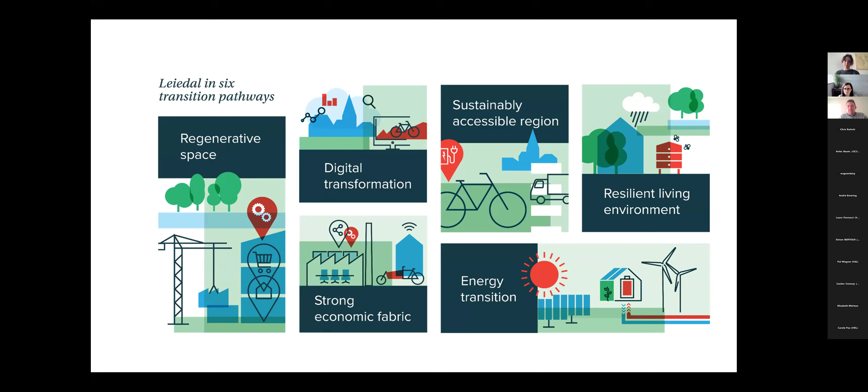We are as a region, but of course, so as the whole of Flanders, highly urbanized. That comes with a lot of negative consequences, like you need a lot of mobility, you have to travel a long time, and there's a lack of open space and nature.

There are big costs for governments, for public services, and so on. One of the main ideas in Flanders on spatial planning is the so-called building shift or construction shift, which is in fact to preserve open space as much as possible, and for the existing already taken space, try to use it in a better, more qualitative way.

Our goal in figures is that by the year 2040, no extra land take will be done anymore. And how do we want to tackle this?

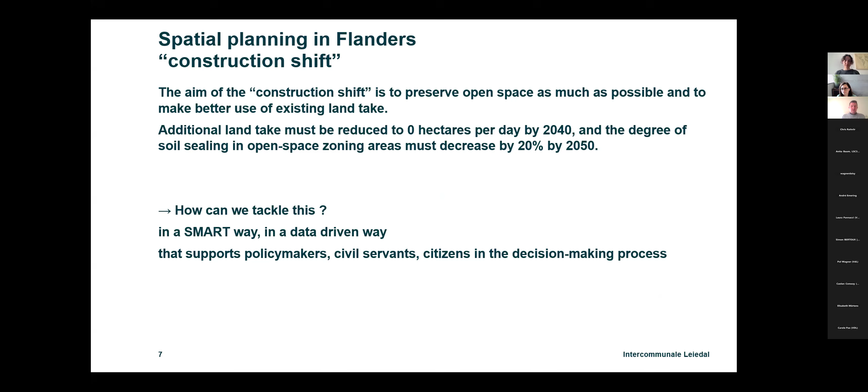Well, we wanted to do it in a smart way, in a data-driven way, because we think it's important and essential that policymakers, civil servants, citizens have the same data, see the same data, so that they can make better decisions.

Our main idea or key element is that we are convinced that we have to build a kind of visualization platform, or at least different platforms where visualization is key during the whole policy planning process.

By monitoring, by developing different scenarios, making simulations, you need visualization as a way to put all the information together in the same way, so that you can share knowledge, share ideas and visions.

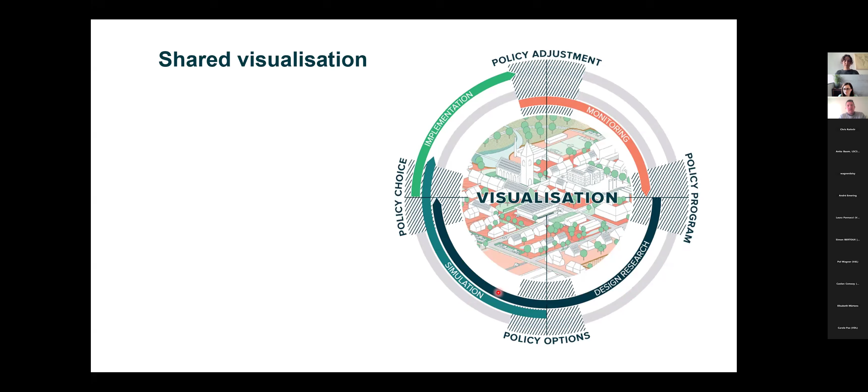So that you can make better decisions. This afternoon, I will present 3 projects. I'll put it in the scheme of visualization, and explain a bit of our first steps in that digital transformation process.

The first project is the Data for All project. It's an Interreg North Sea project that ended last year. The main idea was that we work on mobility data, especially data concerning bicycles.

The idea is that we collect qualitative data around mobility on a regional level, not only for one municipality, but we try to combine it on the regional level, and then we want to gain insights into it so that we can use it for policy making.

The challenge that we were confronted with was that there is a lot of data, but it's very fragmented. It's on the cloud, on a PC of a civil servant, and there are all kinds of different types of data.

There is data about the shared mobility bikes, but also when you measure velocity, there are 4 or 5 types of radar systems that are used, and we have to collect and combine all these different data types.

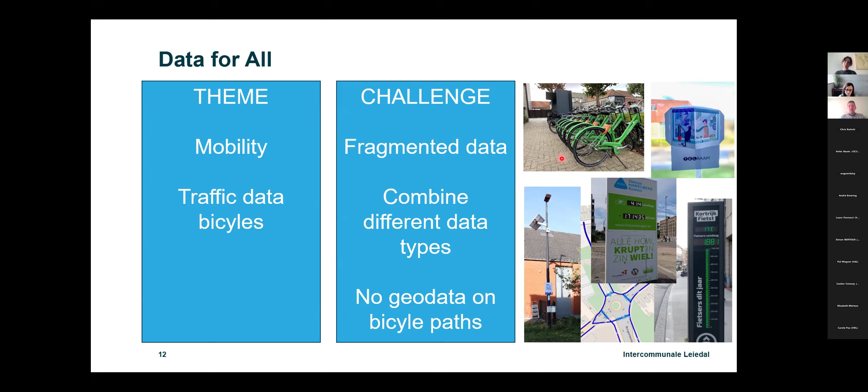What was also important is that even at a very basic level, we don't have in Flanders a layer of a GIS file where only the bicycle paths are present. So we had to tackle all these problems, and our solution was to create a dashboard

that is fed by different data, where we built some data pipelines to combine all these different data types. We also tried to make a first bicycle path layer for the whole region.

On a technical level, I won't explain it too much, but we combined the several types of data. So we collected them, reformed and transformed them, standardized them, and put it in a so-called data vault.

Based on that enriched, standardized, clean data, we had data sets, and we built some GIS services so that we can make the dashboards and the Power BI tools. Because at the end, we had very specific products.

We had a GIS portal where you can see all measurements, for example about the amount of traffic of bicycles. And for each measurement point, you can deep dive into that data with a Power BI report.

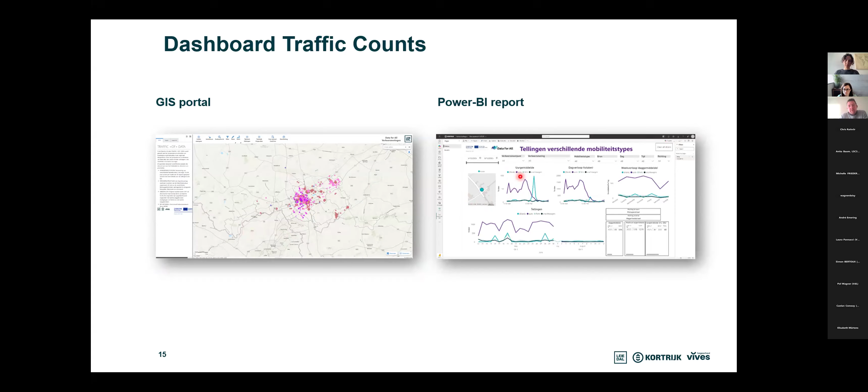I will just show you some screenshots of the applications. This is the dashboard focusing on the city of Kortrijk, where each bullet, each color, is a measurement point. The different colors are because they are different systems

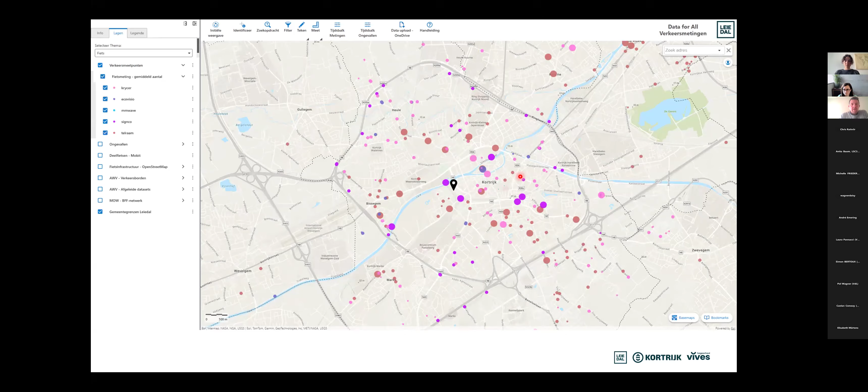that are in place. We don't have it only for Kortrijk, because as an intermunicipal organization, we also wanted to make our products ready for all the municipalities. So based on focusing on the city of Kortrijk, we developed the data pipelines for the whole region.

So at this moment, all the data of the municipalities, but also the data of the province and the data of Flanders, is combined and put together.

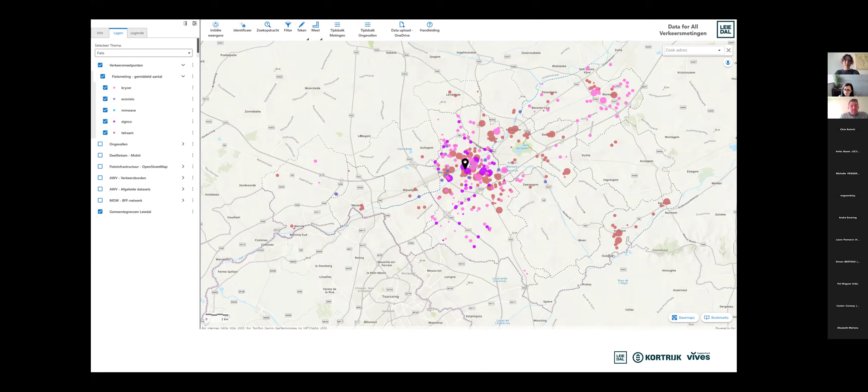And when you want to have more details, you can click on a measurement point, and then you see on a Power BI more information. It's not only the data of the amount of bicycles, but also the accidents that happened.

And finally, we also developed a layer of the bicycle paths based on OpenStreetMap data that we cleaned, interpreted, and categorized, and combined with some other data, so that we now have at least at our regional level a data layer concerning the bicycle paths. That was the first project.

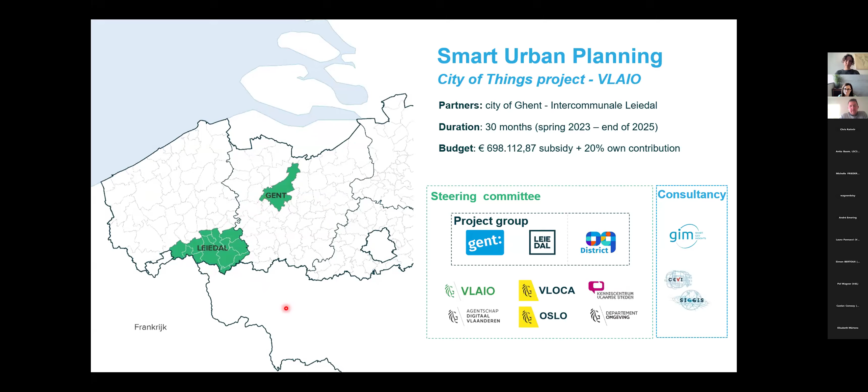We worked together around the theme of spatial indicators concerning urban planning, things like amount of parcels, amount of addresses, amount of buildings.

Net land take, the amount of greenery, and so on. Here the challenge is more or less the same. There exists luckily a lot of data, and there exist a lot of different geoportals to check this data, but they are all separated next to each other, in so-called silos. Another challenge is that this data exists on different scales, different levels, and in different forms.

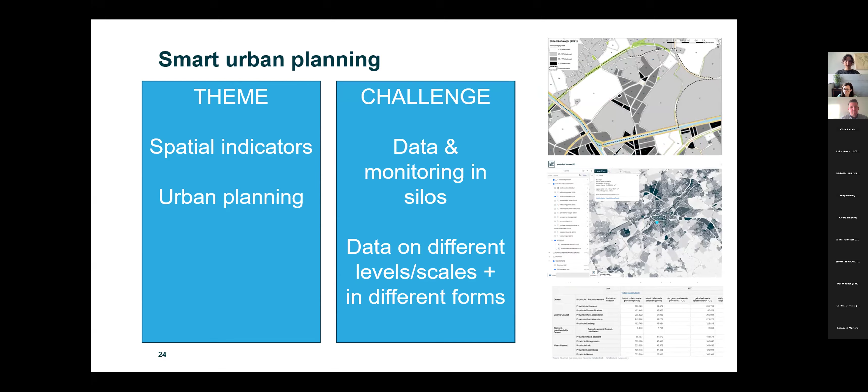The solution we put in place here is a little bit similar. We again developed a dashboard to combine the data, but we introduced a new level: the level of the parcel block. So a parcel as a new building block where you can aggregate and combine data.

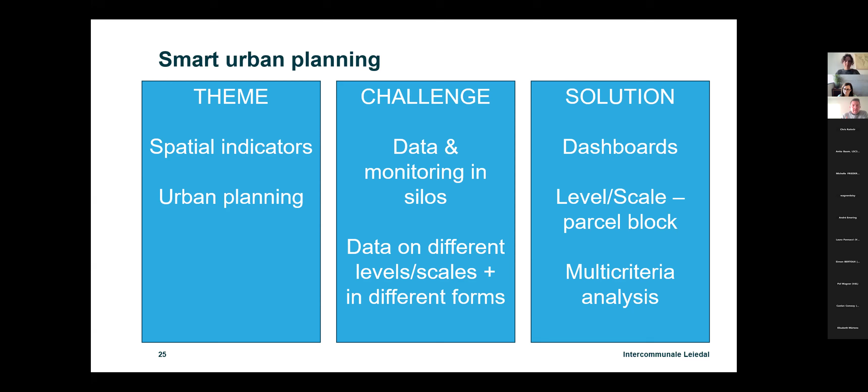Another element, because all the data is next to each other, we organized a dashboard to do multi-criteria analysis to have immediate insight into the data. I will show you the results.

There are in fact two use cases, and in each use case there were four steps. There was the need analysis: what does a policymaker want? Then we checked what data was available. Then we processed the data to realize this dashboard in a data visualization step.

The first use case concerns the proximity of services. As you know, if a city or region grows in population, the challenge is that you need a lot of services to support that population. It's about green space, but also schools, shopping, kindergartens, and so on.

The main question we wanted to tackle was: if you are an urban planning officer, you want insight into which services are in the environment, but also what their surface area is, and what the capacity of a facility or service is.

In Flanders, and maybe in Luxembourg too, if you want to give a permit to a construction project, you can impose some conditions, such as requiring a certain amount of greenery or a certain function, and you need to define which type of service or facility to impose. This application can be useful for that.

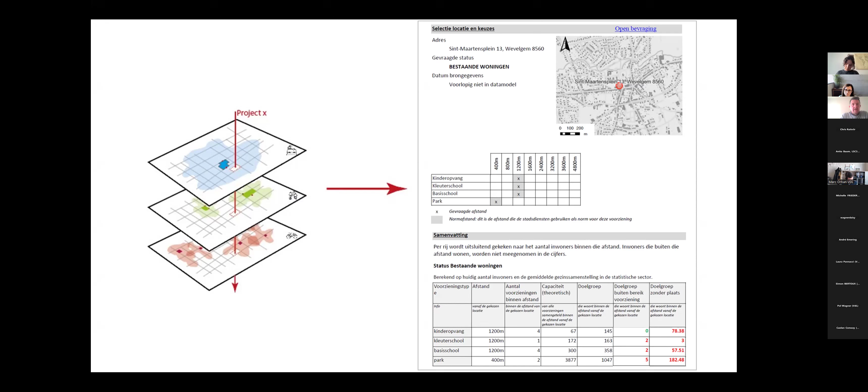There was another use case, concerning the monitoring of the land take, with the idea that within 2040 we can't take more, or use more land than what's already taken.

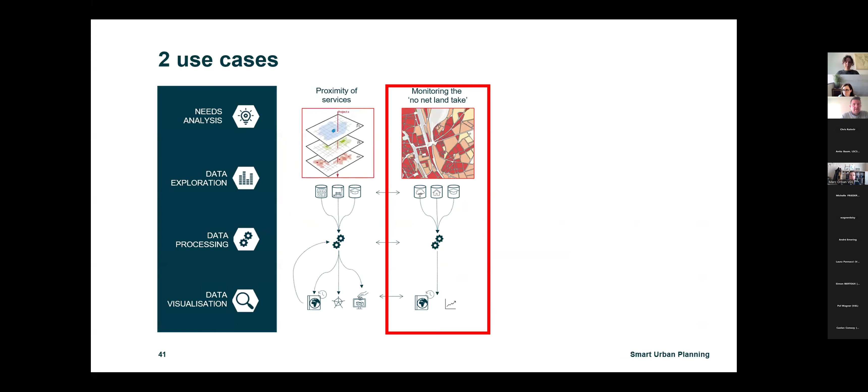We developed a dashboard that puts together all indicators and where you can do some analysis. Instead of one GIS portal or dashboard for one indicator, we combined a lot of indicators already in one environment, and we developed the pipeline behind it to add other spatial indicators. You can see the indicators for several years.

You can indicate a specific place, the so-called parcel block. If you click on it, you have information on all the parameters for that specific place. But you can also click another parcel and then make comparisons.

You can combine different parcel blocks because you want more insight into a bigger area. And of course, you can draw your own area to collect all the information and send it to your email, with the spatial indicators and their values for the location you drew.

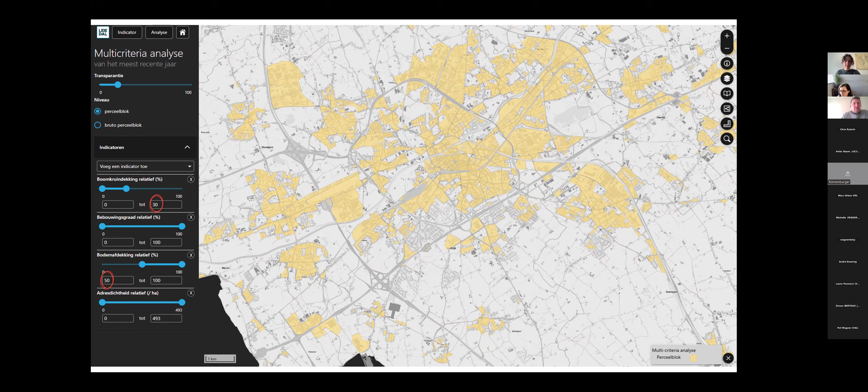The third project is the Twin for Resilience project. That's a project we do together with Leiedal and also LIST located in Luxembourg. It's a project that's still ongoing, and it works around digital twins.

Digital twins, but specific for urban planning. The idea is that decision making is hard, is difficult, and with the digital twin we can facilitate that decision making. But there are some challenges.

At least for us here in Kortrijk, we have a lack of 3D data, especially for buildings. You have to find out what technical platforms you will use, the internal processes to collect data, but also the way you make your designs and so on. You have to define it more.

And how can you use that digital planning in participation, so that the decision making, the discussions between policymakers, between administration and policymakers, between policymakers and civilians or citizens, goes quicker, more objective, and so on. The solution we see here is, first of all...

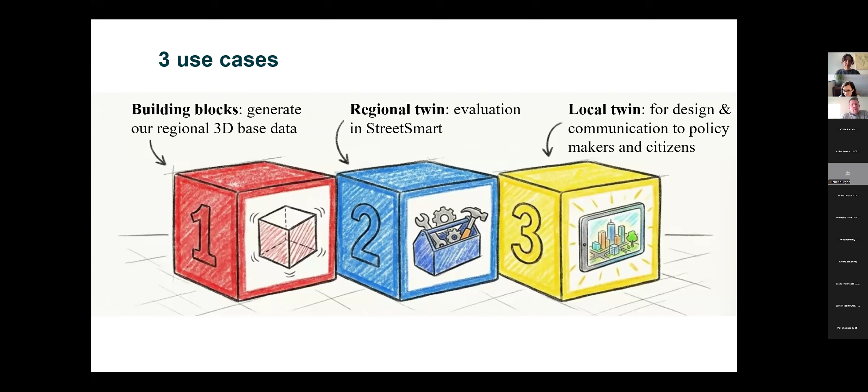The first use case is again a very basic element. Nowadays, what do we have from the Flanders level? We have 2D data of all the parcels, and there is also 3D data, but at the level of detail one—you only see the footprint of the building with the height, so you have a kind of cubes. This is clearly not enough if you want to do a serious spatial plan.

So what is our aim? That we are at least at a level of detail two, so that you see a building with the shape of the roof that's recognizable, and also with some extra buildings around it. Luckily, we have point clouds in our region. We take it now.

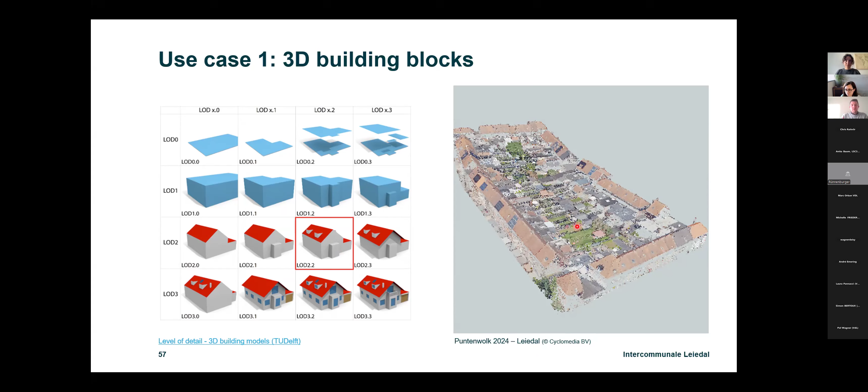This year it will be the third time we do it, so we do it every 2 years. So we have quite an actual insight and overview of point clouds of actual data about this.

And within this project, we had the opportunity to work with the open source roofer tool, and that tool combined with these point clouds and also with the contours of the buildings, we were able to realize our own LOD 2.2 3D buildings.

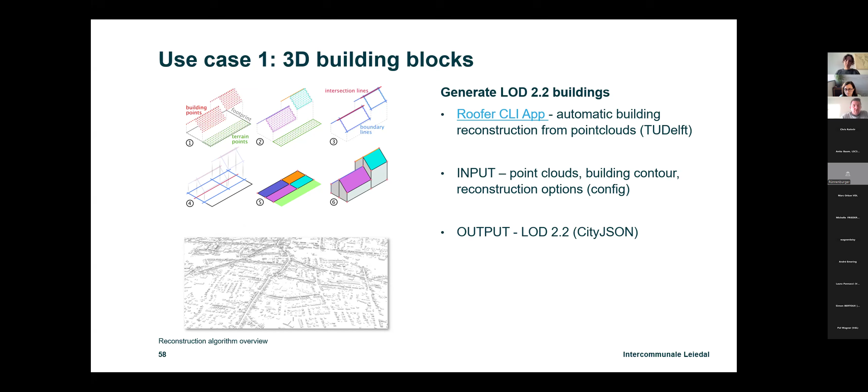I will show you what that means. So if we had that, now we can generate our own 3D buildings, and we can do it for each project we have planning task for. That's quite interesting. Beforehand, we had to look for or buy this type of data. Now we can generate it immediately, and we can do it every 2 years again.

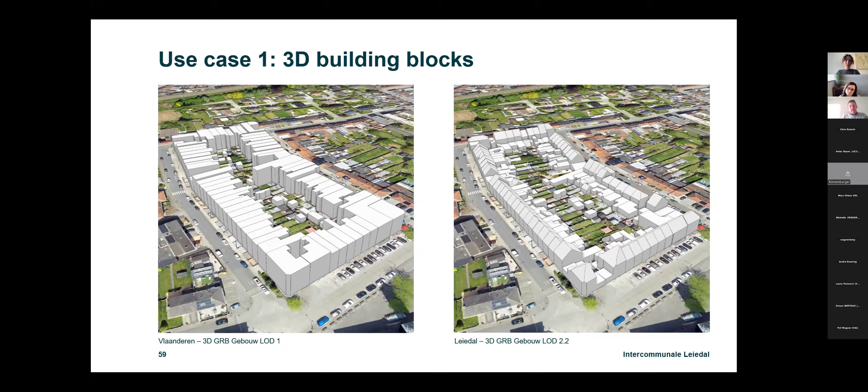So every 2 years again, that's also interesting. We have actual, or more or less actual, data on this. We are able to export it or transform it into different data types, so we can use it in SketchUp, for example, in a GIS system, or also in a game engine.

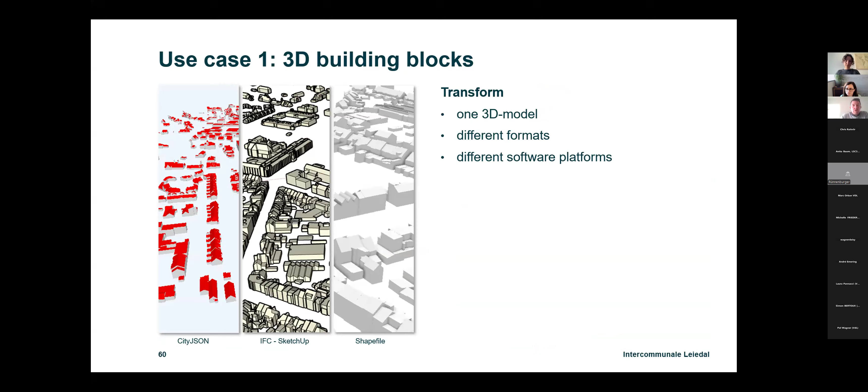Here you see the data where we generated it, and another school, a gaming school, used this data to give a demo of how you can use this data in a game engine and explain a future development of a part of the city.

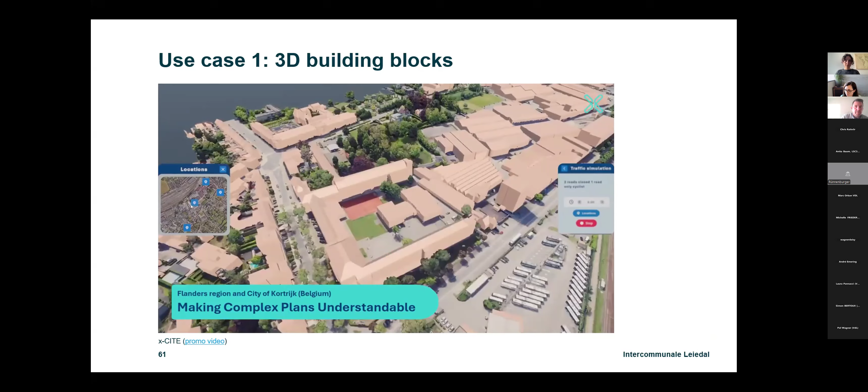It also has the ability that with this data you have immediately richer data, because you have the height of the buildings, the volume of the buildings. You can make a combination of the amount of surface versus the footprint of the building, and that gives you an idea of density as well.

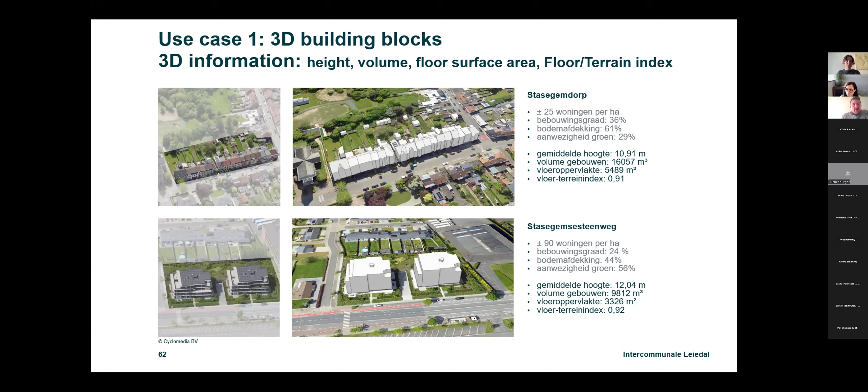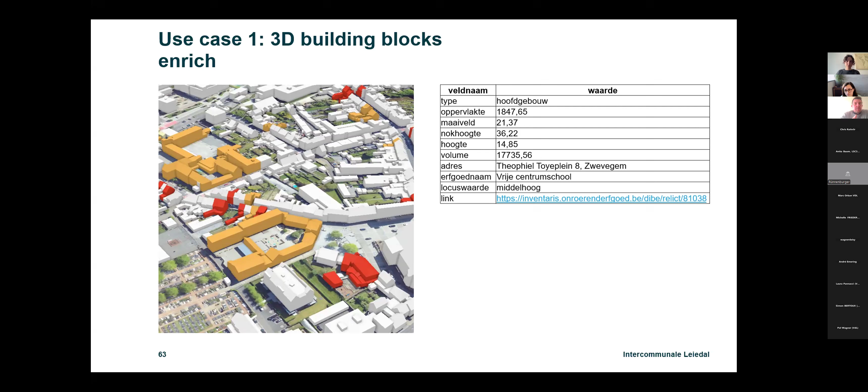And we can link all the data that we already have on a 2D level in GIS data with these 3D building blocks. So that's very interesting to give an insight, and maybe here, for example, it's about the heritage and value of all the buildings. So we can use existing data and visualize it in a 3D way.

To end this first use case, now we are doing some explorations of how we can distill data out of the point clouds concerning trees and also concerning the surface, the terrain model. But that's still work in progress.

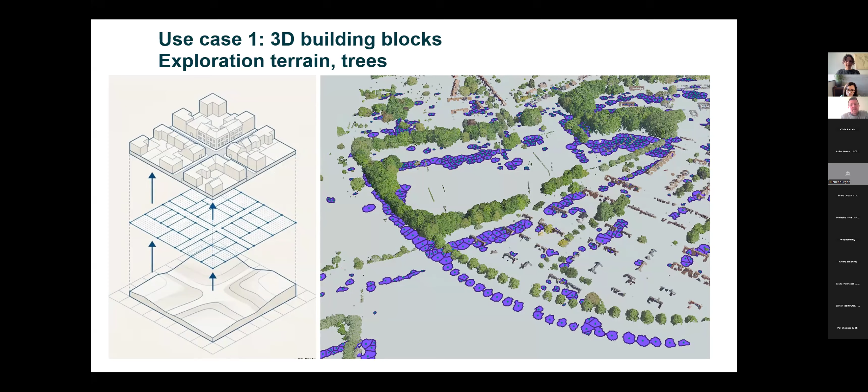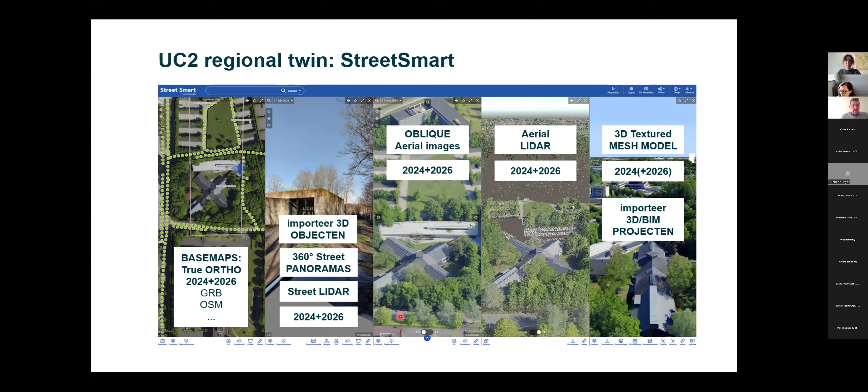The second use case is the development of the regional twin. In fact, we have a regional twin because when we collect all that point cloud data, we use the Cyclomedia Street Smart solution, and that gives you aerial images, street view images, but also a 3D mesh, a 3D environment where you can explore, do some measurements, do some shadow analysis and so on.

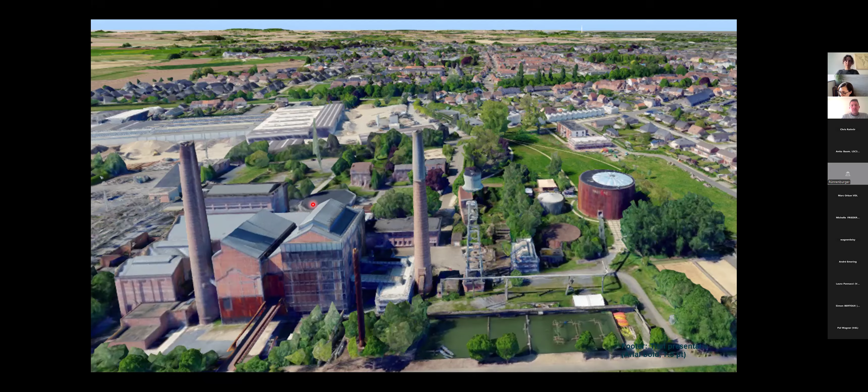So we've already had it for, I think, 4 years now. And the idea is, what we saw is that the municipalities use it quite a lot, but they don't use it enough, because the possibility to put new 3D models of a future development in and do that kind of analysis is something they don't do enough.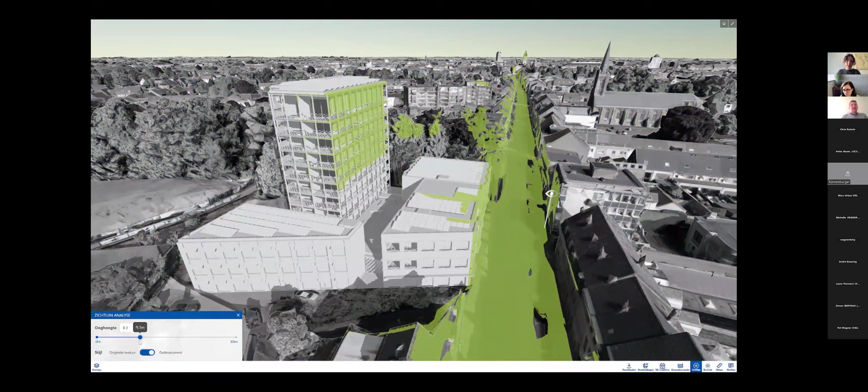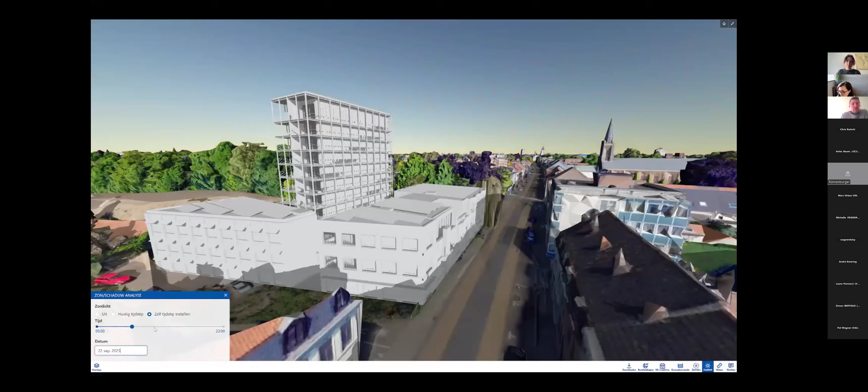So we train them, we show them how to do it, and also made some governance material. For example, what you see here is that we put in a BIM model, a 3D model of a future development, and we do some sight analysis.

You can do the same, but then also do shadow analysis for all moments of the year. That also gives a good insight into the impact of the building, and this application also makes it possible to put that model into the environment and have a quick tour.

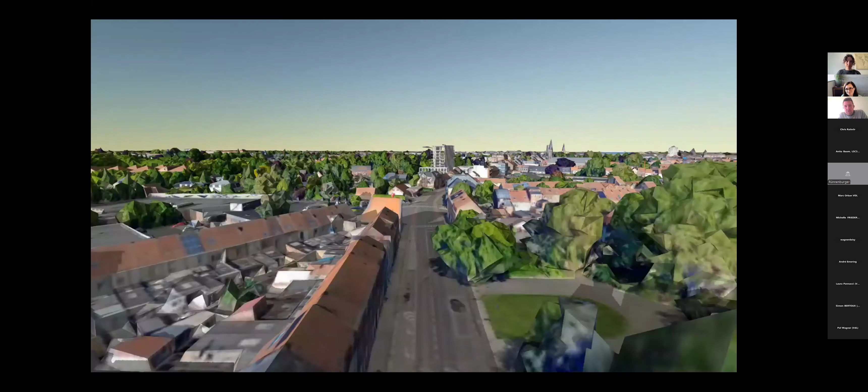I will look if that works... okay, the idea was that it moved but it didn't yet. Oh, now it did. So you can make a tour and give a quick impression of how that new development fits in the environment, or maybe it doesn't fit in the environment.

It's not only about showing the solution and training the solution, but we realized that in this project it's also important to have good guidelines and good governance of things. So we developed 3 things.

We developed a step-by-step plan for the municipalities so that they know how they can work with that type of data and how they can put it into this Street Smart application. We also made some guidelines for the designers and architects on what form they have to give their information in.

But, and that's also very important, we made a draft agreement between the designer and the municipalities to create trust, to make it very transparent what data they give, how it will be used, and that the property rights stay with the designers, and so on.

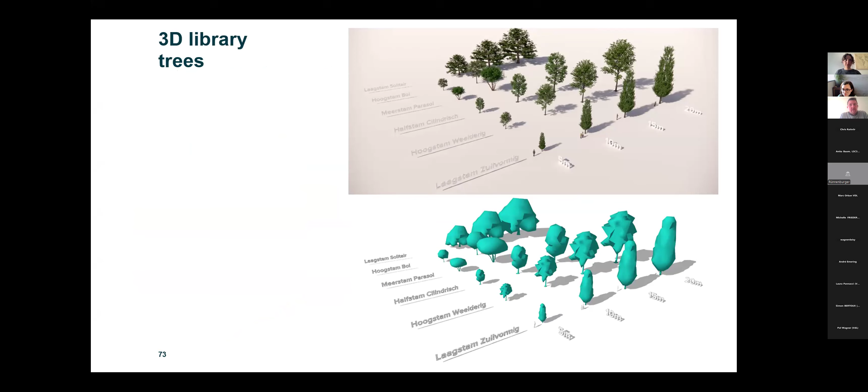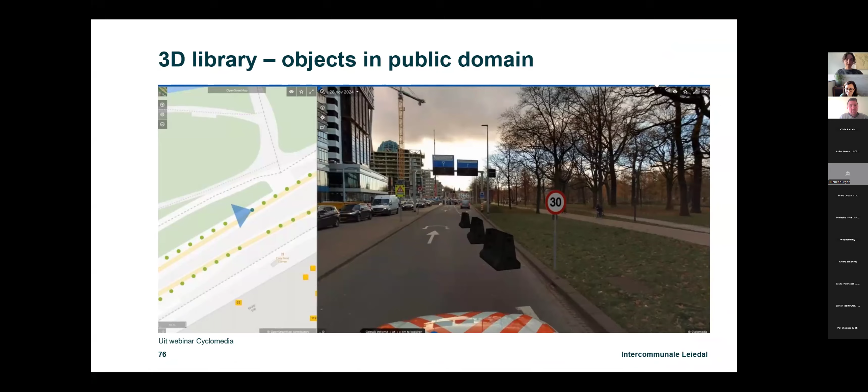We also are working on a 3D library of simple objects like trees to put in these 3D environments, to also have a quick analysis, a quick evaluation of a project. We do it in a 3D environment, but also on the street view element.

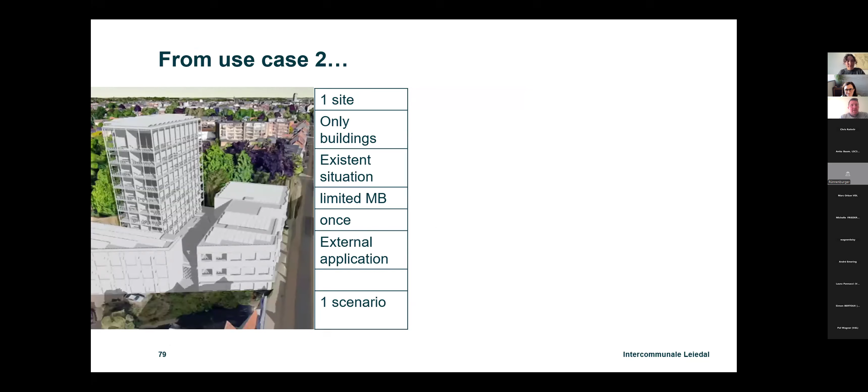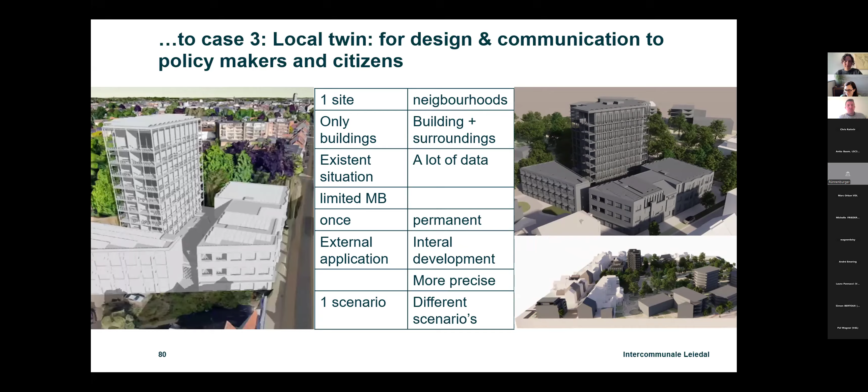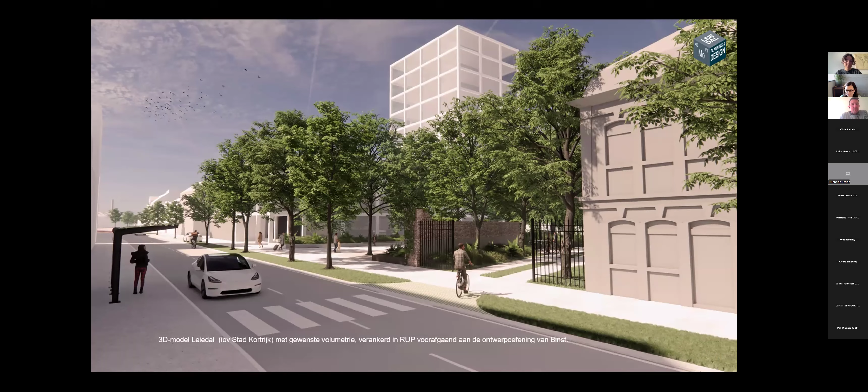So I told you about use case two. Now use case three, I can't show a lot because we are effectively working on these elements in 2026, but it gives a lot more opportunities. Instead of visualizing one site in an environment, we make our own environment where we can put all different BIM models or developments. So you see it in one environment, not only buildings, but also trees. And you do the scenario analysis and comparisons of, for example, this design proposal or another design proposal. It's also possible to visualize terrains and make some animations.

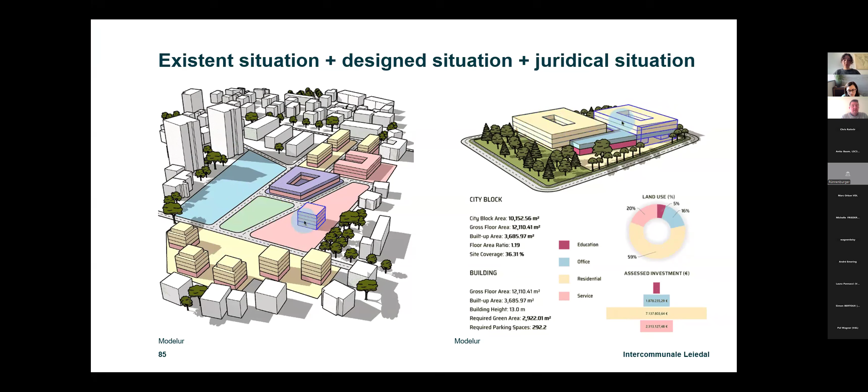And finally, as I promised in my last slide, the idea is that we don't show only the existing situation and the design situation, but we also have the ambition to show the juridical situation, so that if you plan or draw some things, you immediately see the impact in terms of what's possible regarding urban regulations, but also the impact and amount of surfaces that are built and so on. And here I'll end, with this overview of all the projects we use to build these platforms of visualization. Thank you.

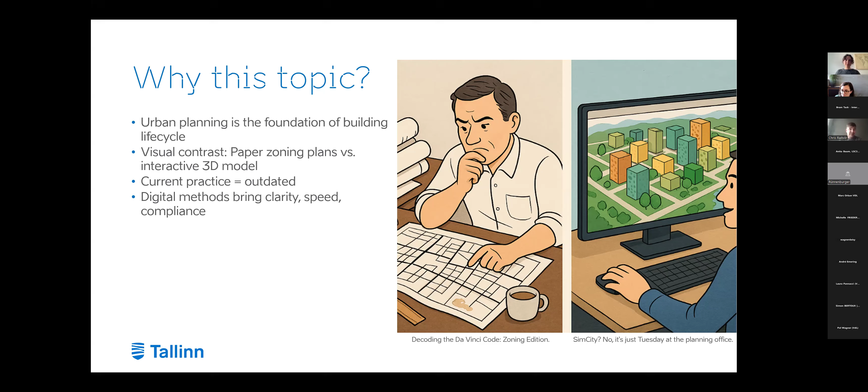So why did I choose the topic of urban planning? Here we see two different realms: the zoning plans on paper, trying to somehow decode the situation, and something some of us have already seen from the 90s, playing SimCity. So actually, this is how you can do city planning. The technology has been there for quite a long time; it's just that current practice is a little bit outdated.

But going into these digitalizations, we always have to ask ourselves: what is the purpose, why are we doing it? Actually, the purpose is really simple. We have to create the best possible urban environment, a good place to live in, a really desired destination to arrive to. And this is the aim we always have to have at the back of our heads.

But the situation is not that ideal as it was here, and as it is on all the renderings that you see for all the plans and all the new projects - sunny, nice, beautiful people, nice cars. It's not the reality, actually. The reality, at least in North Europe, in Estonia, most of the year it's very dark. It's rainy, not very nice outside. It's like +7, endless November.

And then we have to ask, but now what is the purpose? Of course, it's still the same - we have to create the best possible urban environment, and we have to take the climatic situation into account of doing that. And by just drawing the lines on the paper, can we do it? Perhaps not. But then it would be the question, where is the problem that we can't do this kind of really good environment?

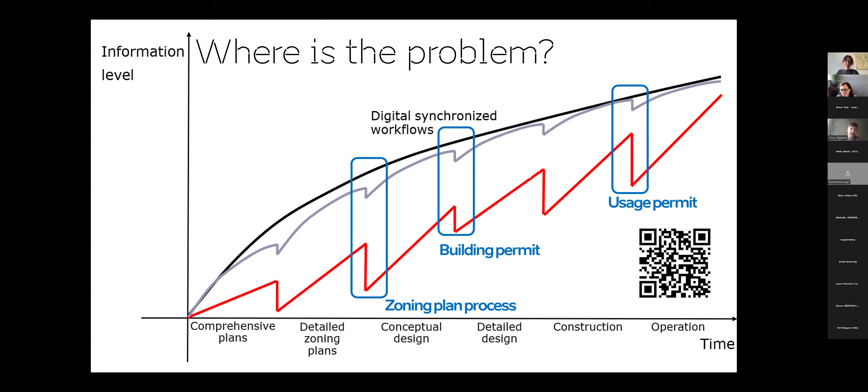And there are 3 points where the private sector can't do anything about it - these legal points where you have to go to the municipality and get your zoning plan approved, your building permit, your usage permit. And I have never met anybody who wakes up in the morning and feels like, what a wonderful day, what should I do? Yes, of course, I should get a building permit, what a nice idea. Well, this mostly is like, now I need the building permit, now I need to get my plan approved. This is the reality, and we have to make it a little bit better, a little bit softer.

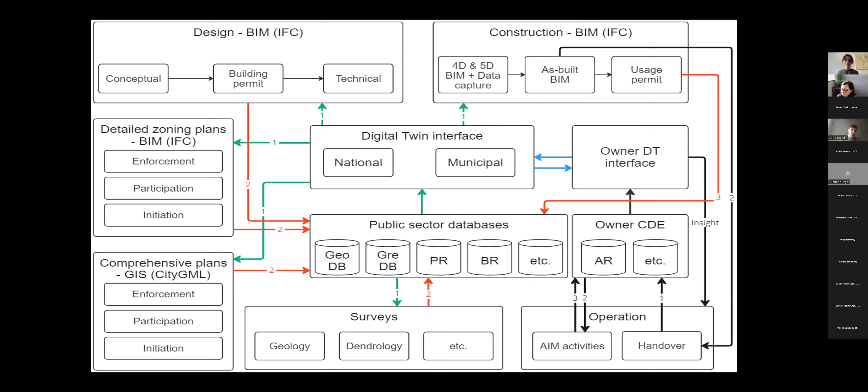But how can we actually reach this kind of situation? It's actually quite easy - going from this kind of document based processes where we have either things on paper, or maybe digital, but inside digital they are PDF, so it's rather electronic than digital. The way would be getting this kind of public sector data core, that we have the open data - for example, a geological database, the greenery database, the planning registry, building registry, address registry, etc. So that we connect all that information and then we query it through the digital twin interface. And by this interface, I would say it's either 2D map or 3D map, or just some kind of brackets that you put information into and then you query the information from the database in different formats.

And when you're doing the zoning plans, then you're not perhaps using anymore the PDFs exported from AutoCAD, but you're just using some kind of CityGML schema for the comprehensive plans, IFC - which sounds perhaps a bit weird, but it actually works - for the detailed zoning plans, and also for the design, utilizing the BIM models. And all that data that is in the models, you can just throw back into these databases through these kind of procedural environments. Of course, they have to be validated so that not everybody can push this kind of information into the database, because the data that is in the database has to be trustworthy.

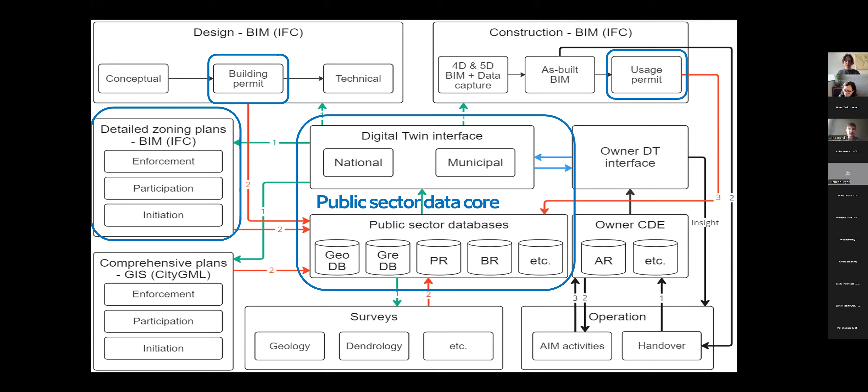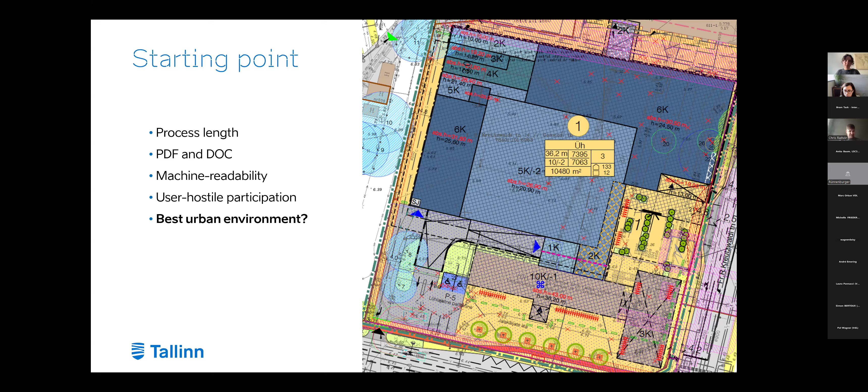Because this was our purpose, we stated that this is our agreement: we want to get the best possible urban environment. We are using drawings like this, where only 30%, 25% in the left corner is what is really being developed, and all the other drawing is legend for how to read this. I say this particular drawing because unfortunately in Estonia we do not have these coloring layers standardized, so in one plan drawing it might mean one thing, and in another it might mean something else. Sounds a bit weird, but this is the reality.

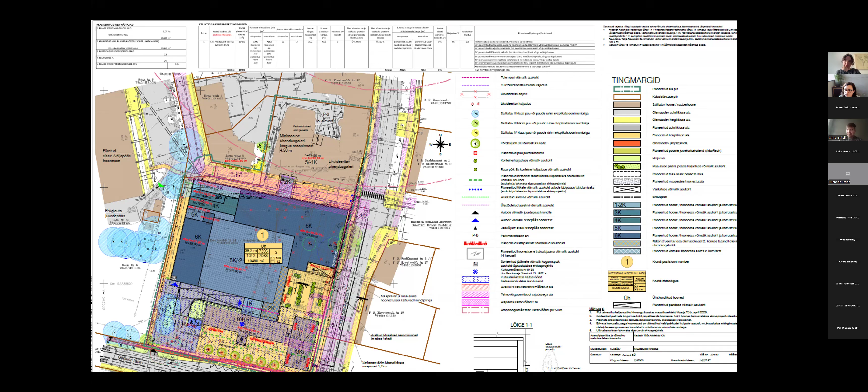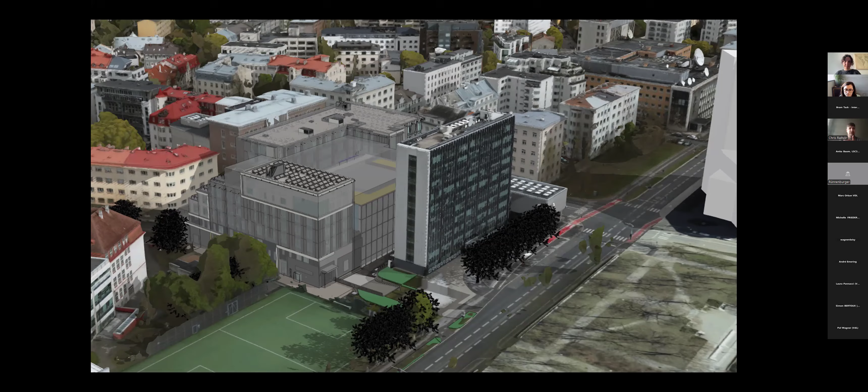And of course, at the moment for the presentation this is a static picture, but this is in the city model environment, and you can look at it from whatever corner you want. You can turn the layers on and off so that you are not overwhelmed by all of that information brought together there. This is how you can actually understand what is going on around you if you're not an architect, landscape architect, or engineer who can just blindly understand these kind of 2D drawings.

So there comes this term, spatial planning information model. It would be something like BIM, but a little bit different. BIM has been around us for a very long time, but modeling planning elements in 3 dimensions and putting the information within it hasn't been around that long. Of course, there are different standards like the Inspire Directive, the Land Administration Domain Model, different scientific approaches. But then again, what is really the definition of this term?

What is the scope of the modeling? What should be done in 2D? What should be done in 3D? What level of geometry should we use? What is the level of information we have to put in? At what stages do we have to use that information? What are these open standards that can accommodate this kind of solution?

And of course, we have to bear in mind the usability of the solution, the compatibility with the most used software, so that if we introduce something extremely new and hard for the people doing it as their everyday work, then adoption will be very challenging because people do not want to change. And of course, we want to speed up the process, but also we have to get better decisions because, again, best possible urban environment - this is what we have to do.

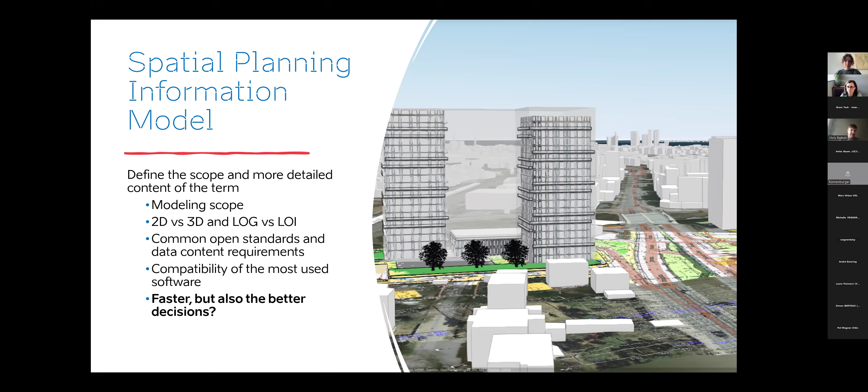In this kind of existing situation, we would have to open 2 PDFs when we want to analyze this kind of coherence area between 2 different zoning plans - for example, are the bicycle lanes continuing normally, is the boulevard going nicely, are there any other disturbances? Then you have one PDF on one screen, another PDF on another screen. They are of course very rich in vector data. Then you zoom in, it starts loading - okay, you go take a coffee, maybe go out for a cigarette, come back, see the computer needs a restart.

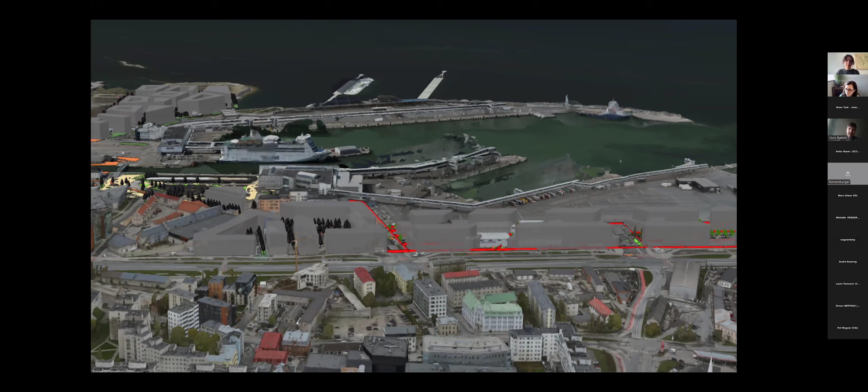Or you just have this information in your city model. You play around with it, you zoom in, and you're looking at it in this 3D dimension, 3D environment that you are actually perceiving the world in every day. And you can much more easily see these kind of usability problems or things like that. And if you already have, for example, we did a simple try so that, in Estonia, usually these kind of plans are made using AutoCAD.

If we take a very similar product, for example, we utilize Civil 3D for this. The other thing was that there is IFC export capability, so we exported these things in IFC. For this kind of analysis, we were using Autodesk Forma, but there are a lot of other software capable of this.

Here is this kind of sunlight analysis. We can see that in the inner courtyards that are dark, they are not getting the 2.5 hour sunlight that is actually needed when they want to develop their apartment complexes. You do not have to wait until the building permit to get that information and find out you can't do this. You just play around with your urban planning solution and make it possible so these kind of situations would not happen at a later stage, where the cost of redoing it is so much higher.

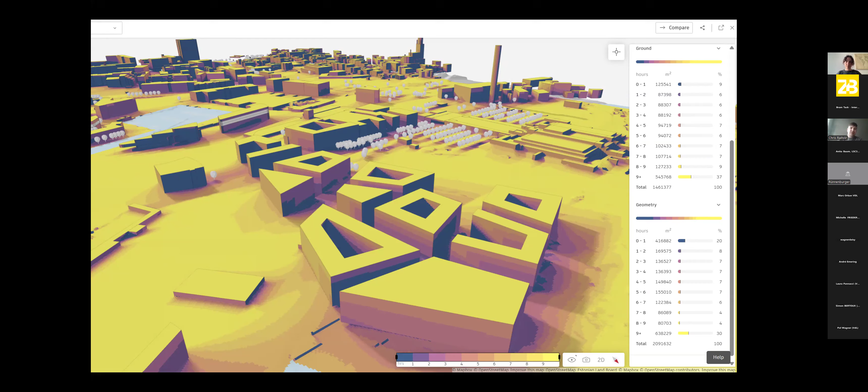The other use case would be the wind. We also did heat islands and sound, etc., but that would take too long to talk about. For example, in the wind corridor, if there was some kind of children's playground put anywhere here, then we have a lot of cold wind in the autumn and spring, but it's still sunny outside, so children go out to play and just get this wind, which is not very good for their health. Whereas in Southern Europe, that would especially be a good solution because of the high temperatures, so the cooling wind would rather be a positive.

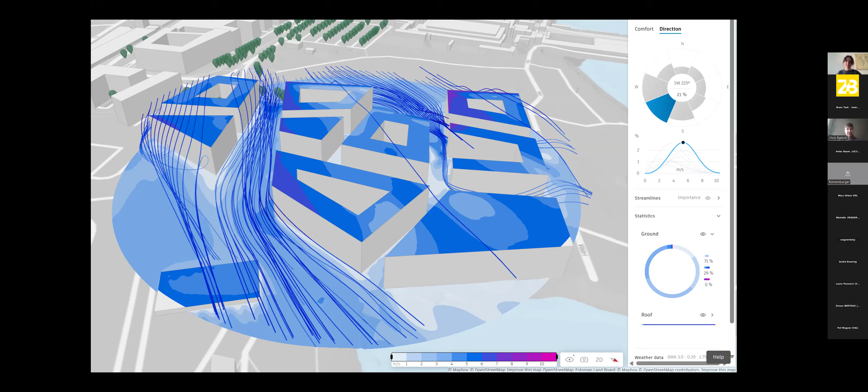So we have this kind of data-based analysis. And when we're doing these kinds of things already, we can automatically check the solution and the detailed zoning plan against the master plan requirements.

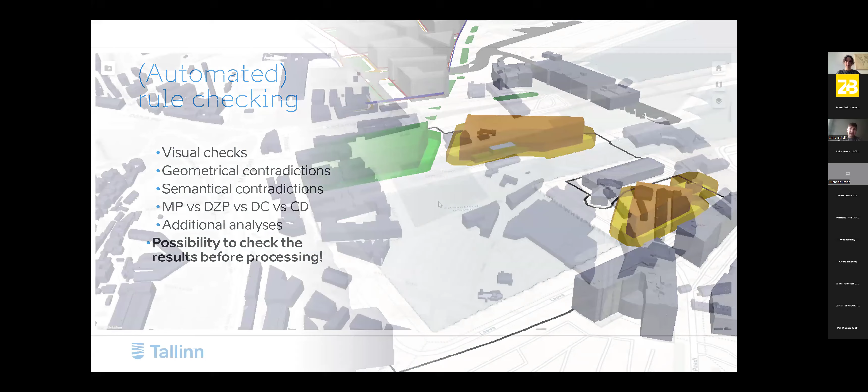We did this kind of proof of concept, and we are now preparing the minimum viable product of this situation, so that we have the existing buildings. We just created some kind of 3D environment so that there are points of interest, the narrowing zones, which are mostly utility networks, etc., and also, for example, the flooding information about water level rise.

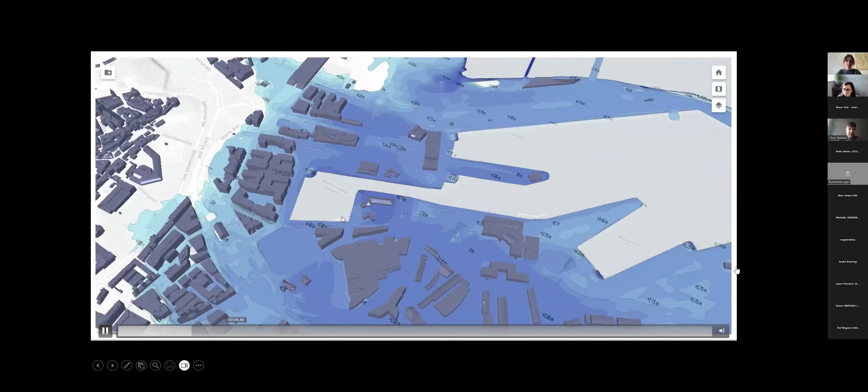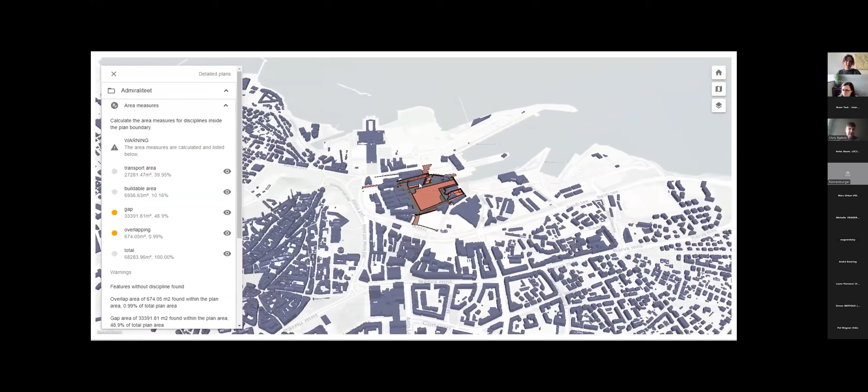I'm going to speed up the video a little bit to get to the point, since we're also running out of time soon. So, about the automated rule checking, we did 7 different proof-of-concept level checks. For example, to understand what kind of areas we have there, we see that 40% of this plan is the transport area, 10% is buildable area, and about 50% there is a gap with no layers there. Also there is 1% of overlapping.

It's in this case almost 700 square meters. This means the transportation layer is on top of the greenery layer or something like that. This doesn't come out so well from the hatches of your drawings, but from the information model it's very well understandable.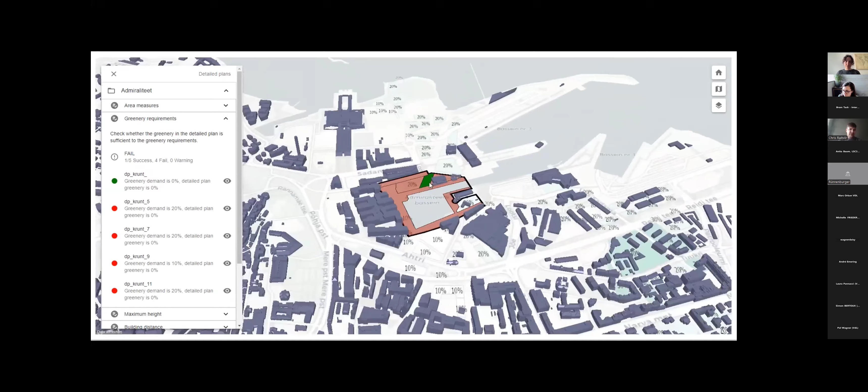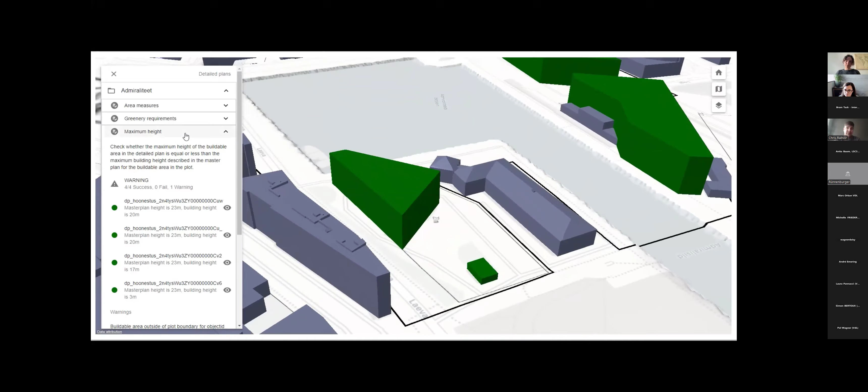Here we have the situation of the greenery requirements, and the master plan says 20% is needed. We query that information from the GIS layers. As you can see in the background here, we have the building heights, and the WMS says 23 meters, and we can see we have 20, 20, 17, and 3 meters in the detailed zoning plan, so this situation is okay with the city's master plan.

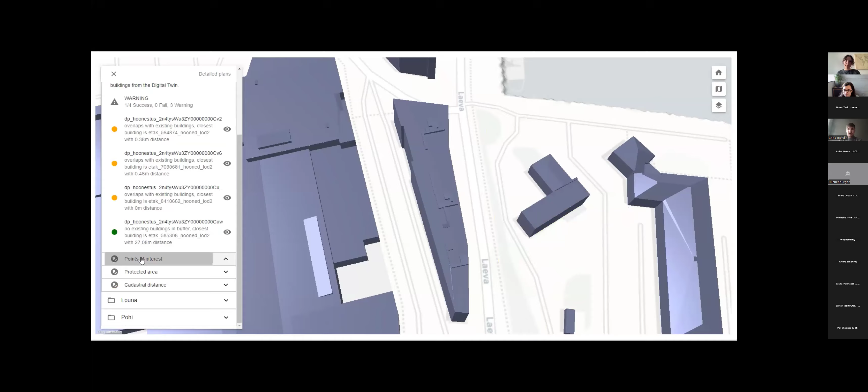This building distance is important because if you build closer than 8 meters, then in the future you have to spend more money due to fire safety requirements. If you have space in your cadastral unit, you can already avoid this kind of situation.

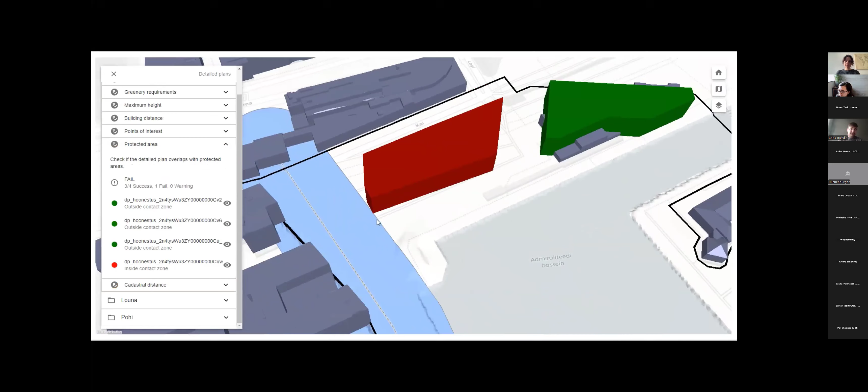And of course, there is a possibility that your buildable area is in a restriction zone. Here it's just slightly touching the railway protection zone, but we can see that this is an issue and has to be moved a little bit.

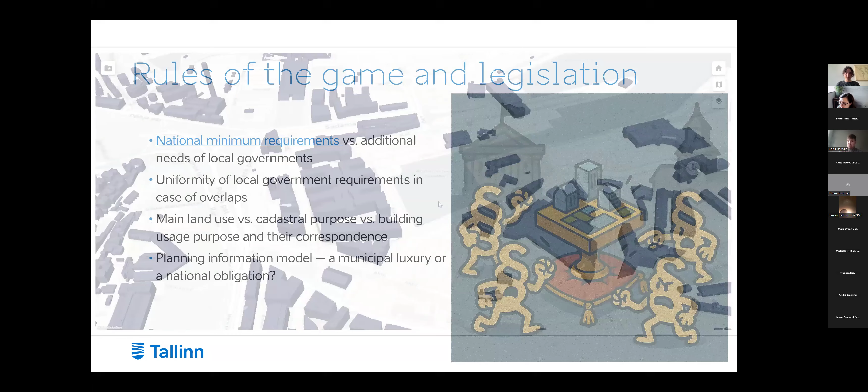But of course, with these kinds of checks, there are the rules of the game and legislation about all these kinds of things. Then we have to understand the data needs — what are the national minimum requirements and what are the additional needs of local governments? For example, if the city of Tallinn and the city of Tartu, another city in Estonia, would need something extra that is not in the national minimum requirements, how do we keep this uniformity? And also the question: is this planning information model a municipal luxury or a national obligation?

I'm just tying my presentation up, so this is the last slide. The challenge is: why can't we do it very simply? The technology is out there.

We could just have this kind of development for one year and everybody starts using it. But planning is perceived as a form of art. There is limited standardization, and when we want this kind of standardization, it's quite hard for the market to adopt, and it needs change.

Resistance to change is, of course, the challenge everywhere. Who wants changes? Everybody. Who wants to change? Nobody. With automated checks, this is also a challenge: should we have very strict rules for urban planning, or do we want lots of room for interpretation? If we want room for interpretation, we can't have good automated checks, because computers do not like a lot of room for interpretation. Computers like measurability and definite amounts of things.